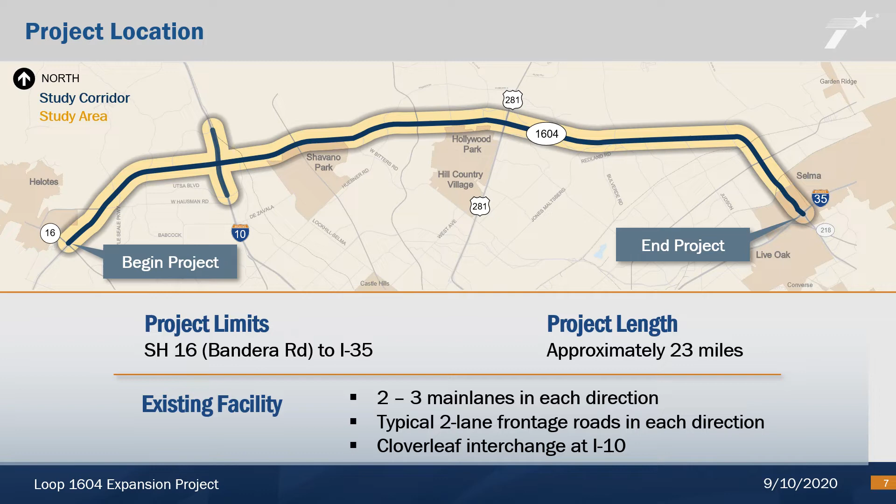The project limits on Loop 1604 extend from SH16, also known as Bandera Road, on the west end, to I-35 on the east end, a total length of approximately 23 miles. The existing roadway typically has 2 or 3 main lanes in each direction and 2 lanes along the frontage roads in each direction. The study area also includes the existing Cloverleaf interchange at I-10 and extends along I-10 from Camp Bullis Road to just south of UTSA Boulevard.

The Loop 1604 expansion project is needed because the capacity of Loop 1604 from SH16 to I-35 is inadequate to meet current and future traffic volumes. This has resulted in congestion, reduced mobility, and longer delays for drivers. The purpose of the project is to accommodate current and future traffic volumes in the project area, with peak period speeds closer to the posted speed limit.

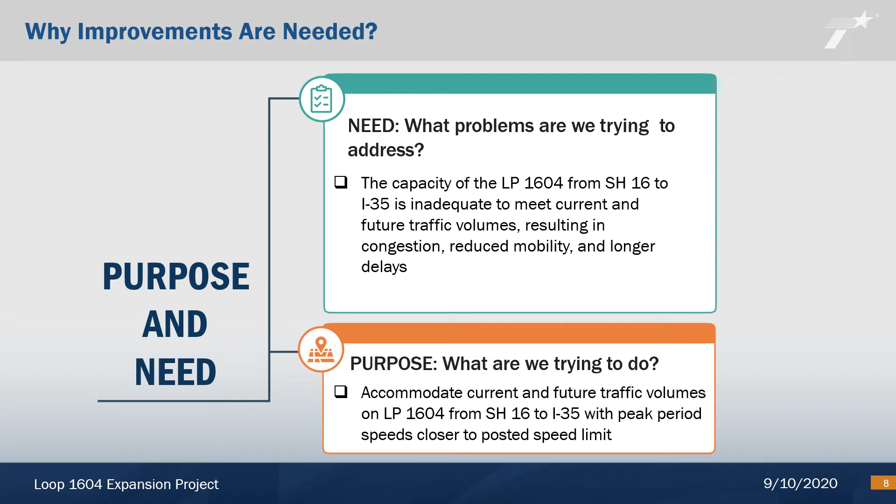In 2018, the existing daily traffic volumes along Loop 1604 varied between approximately 112,000 vehicles per day to 150,000 vehicles per day. By the year 2045, traffic volumes on Loop 1604 are expected to nearly double, with volumes reaching 225,000 to 290,000 vehicles per day. The existing travel times to go from one end of the corridor to the other are approximately 29 to 37 minutes. Without any improvements, these travel times are anticipated to increase to 64 to 113 minutes by the year 2045. With the proposed improvements, the travel times are anticipated to decrease to 26 to 30 minutes.

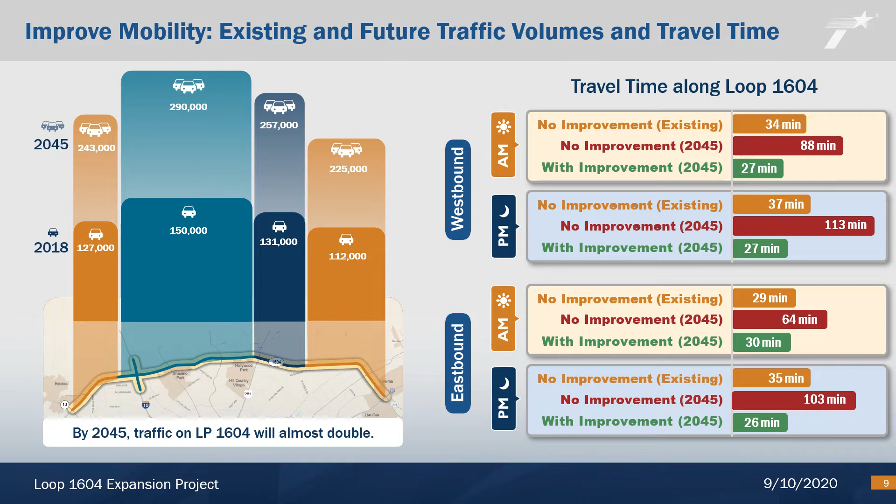The proposed improvements include the addition of one high-occupancy vehicle, or HOV lane, and two main lanes in each direction of travel with no toll lanes, a new fully directional interchange at I-10 and Loop 1604 to replace the existing Cloverleaf interchange, and continuous sidewalks and bicycle accommodations along both frontage roads. The proposed improvements fit within the existing right-of-way, so no additional right-of-way is needed.

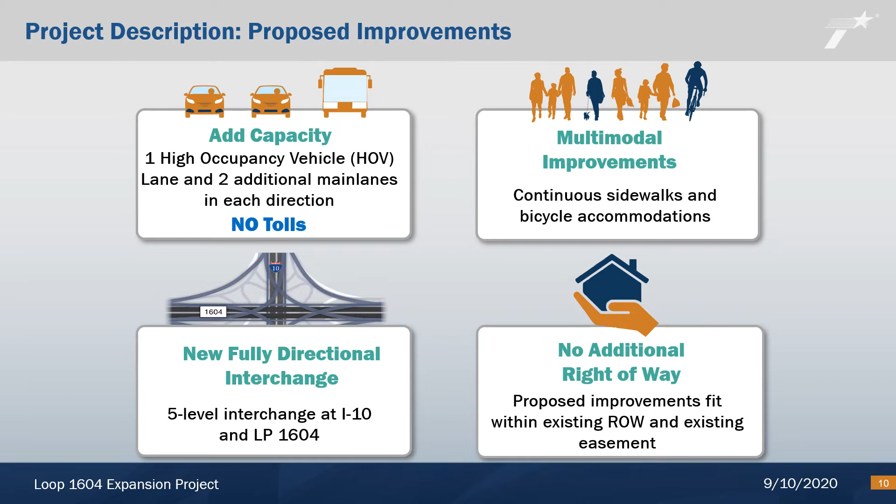The existing typical section along Loop 1604 generally contains two main lanes in each direction of travel, an open median, and two frontage road lanes in each direction of travel. Sidewalks are not continuous along the frontage roads, and the frontage road shoulders do not consistently accommodate bicycles.

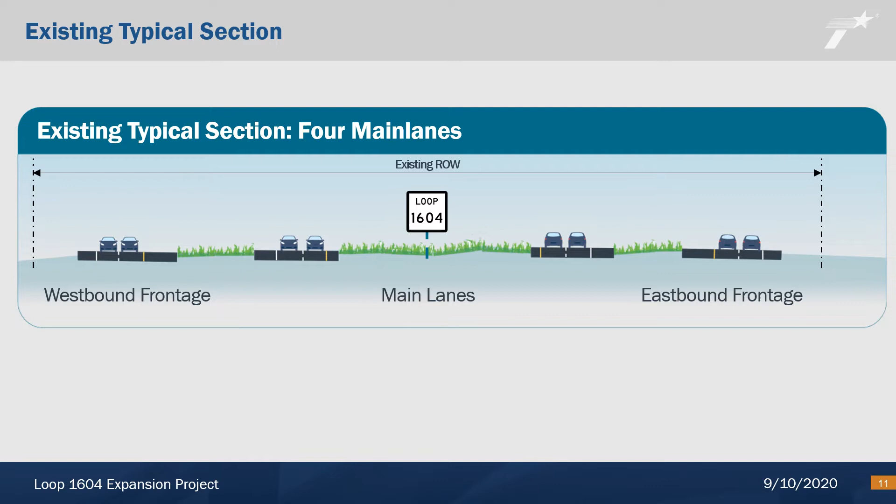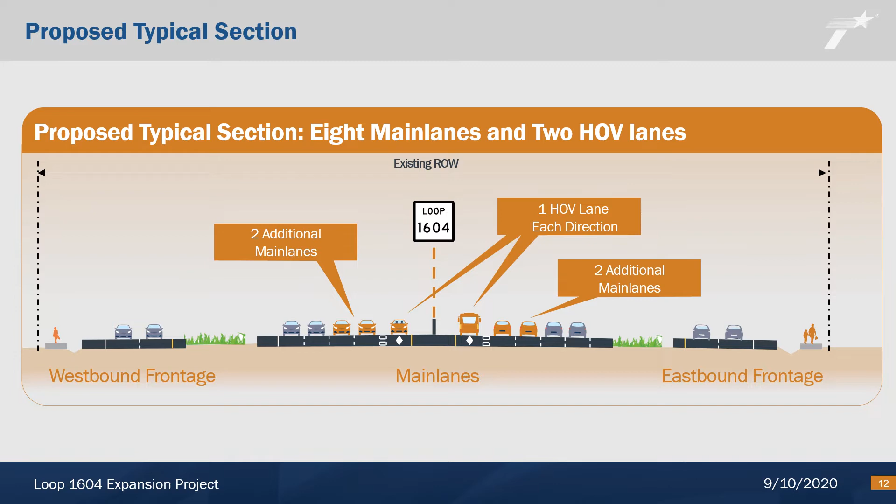The proposed typical section includes a total of 4 main lanes and one HOV lane in each direction, a closed median, 2 frontage road lanes in each direction of travel, and continuous sidewalks and bicycle accommodations along both frontage roads.

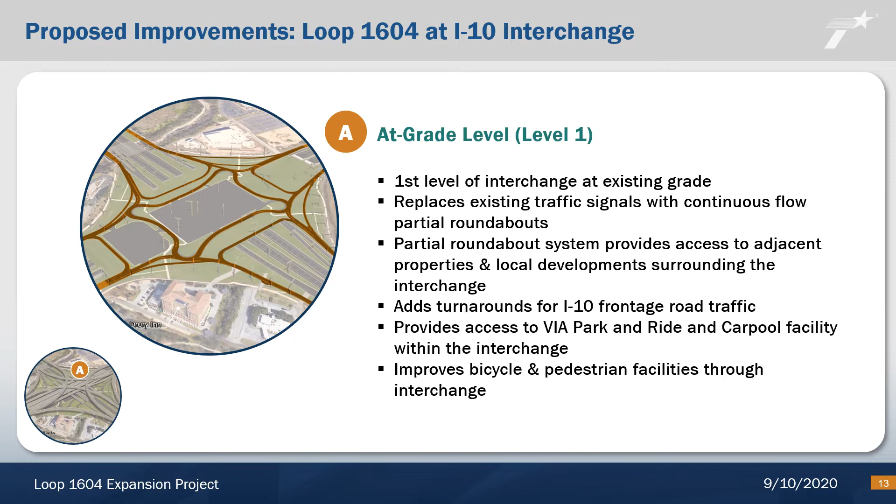The next 4 slides describe the different levels and the traffic movements at the proposed Loop 1604 and I-10 interchange. The first level of the interchange would be at existing ground level and would replace the existing traffic signals with roundabouts. This level provides access to adjacent properties surrounding the interchange area. Turnarounds would be added along I-10, sidewalks would be provided through the interchange area, and the existing VIA Park and Ride facility would be modified to fit under the new interchange.

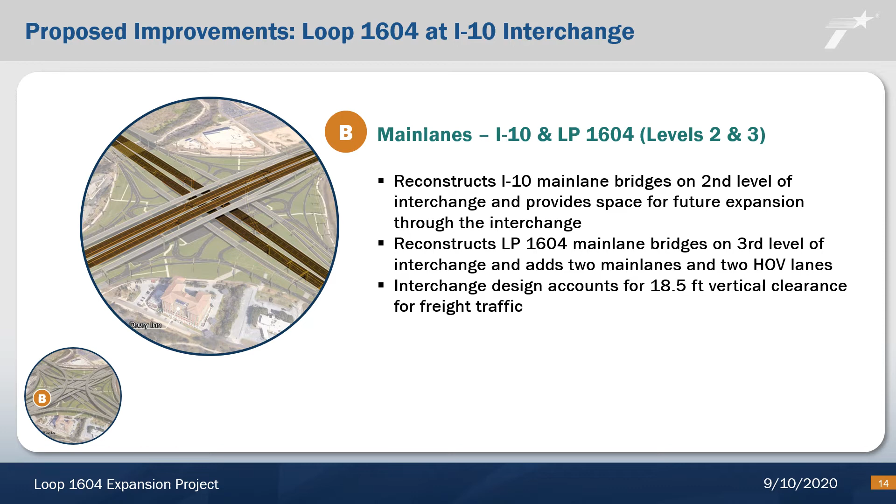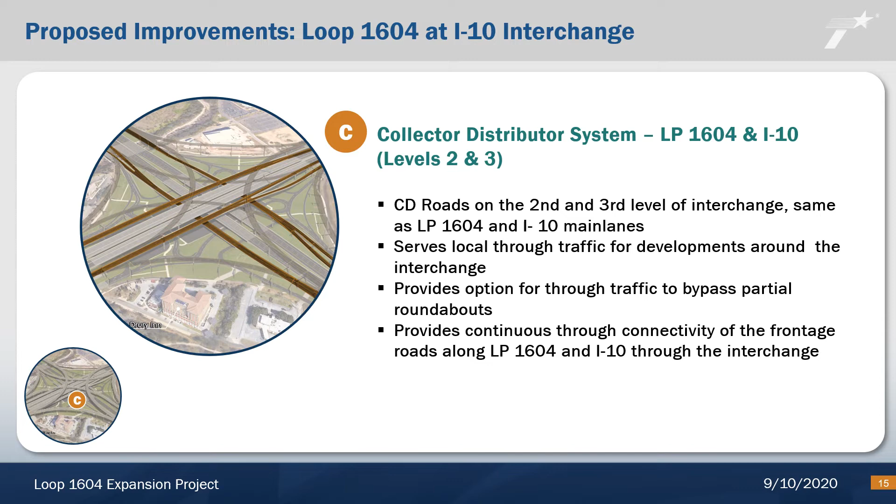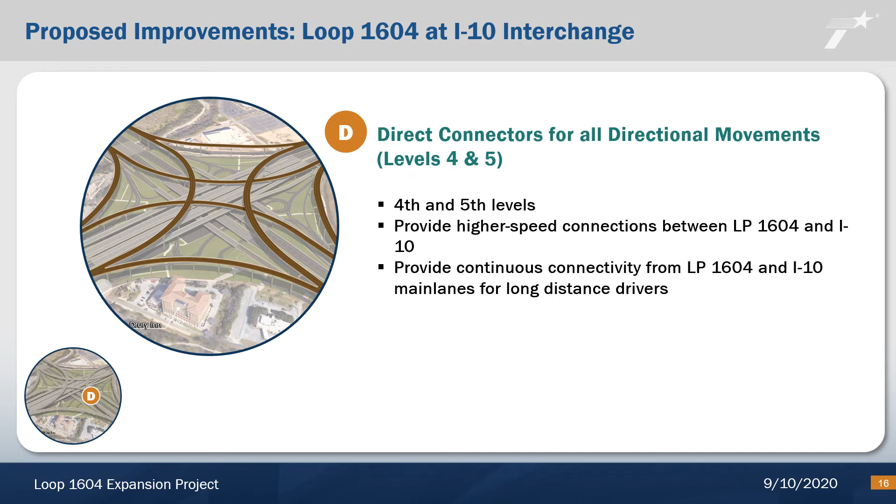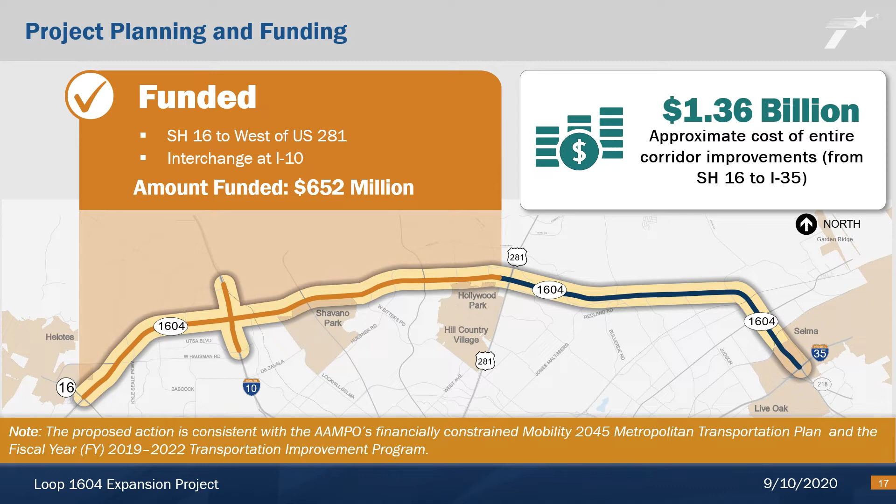The anticipated project schedule after this September 2020 public hearing includes the completion of the schematic design and environmental documents in late 2020, environmental clearance in late 2020, the start of construction on the Loop 1604 expansion from SH16 to west of US 281 in the first quarter of 2021, and the completion of construction from SH16 to west of US 281 in 2026.

Numerous environmental studies were performed for the project to comply with environmental regulations and policies. They cover a wide range of topics, including traffic noise, water resources, biological resources, air quality, cultural resources, community impacts and hazardous materials. These studies were documented in over 24 technical reports and summarized in the environmental assessment. The environmental assessment is available for public review and comment as part of the virtual public hearing and on the project meeting notice webpage.

TxDOT coordinates with various agencies regarding the project, including the Alamo Area Metropolitan Planning Organization, Texas Historical Commission, Edwards Aquifer Authority, Texas Commission on Environmental Quality, Federal Highway Administration, and the U.S. Fish and Wildlife Service. In addition, TxDOT has received public input from a variety of stakeholders, such as cities, school districts, and emergency services, and during open houses for the general public.

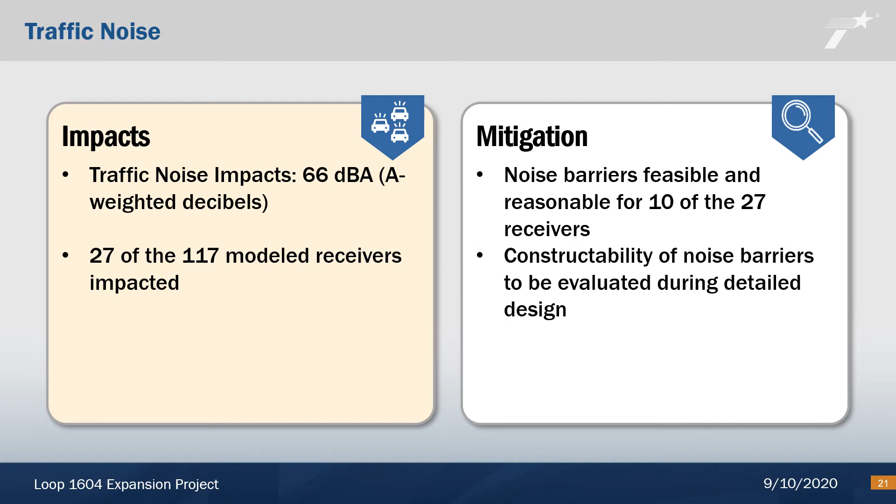The project would also excavate 1.1 million cubic yards of fill, soil, and rock from the recharge zone. Most of the excavation would be less than 10 feet deep. However, the drilled shafts for some bridges would be 80 feet deep. 9 sensitive features, primarily solution cavities located at the base of road cuts adjacent to the main lanes, would be removed by the project. The project would not directly affect groundwater because the groundwater is located roughly 140 to 225 feet below the surface.

However, the near-surface impacts quantified here may indirectly affect underlying groundwater quality during construction through the erosion of disturbed soils and spills of construction-related materials. After construction, the additional impervious cover would accumulate pollutants which may infiltrate to the underlying groundwater if the runoff is not treated. The project would include mitigation to avoid and minimize impacts to the Edwards Aquifer during and after construction. The key mitigation elements include the following.

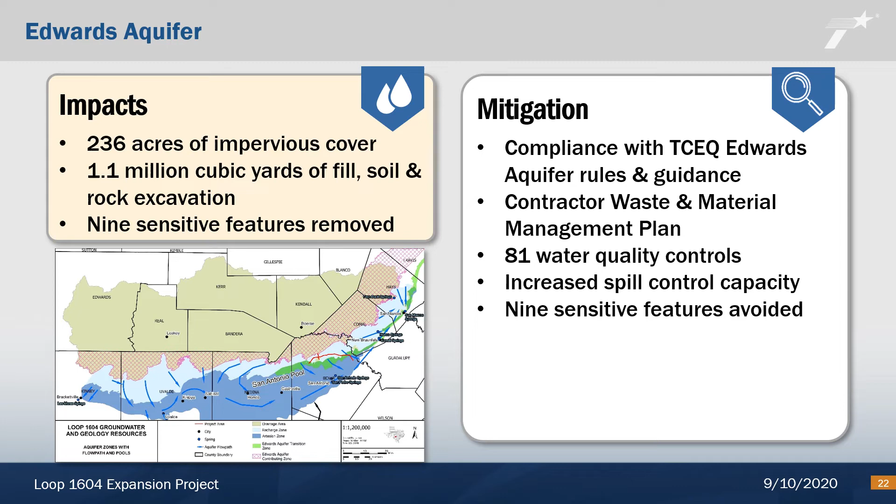The project would include the installation of 81 stormwater quality controls that use media filtration or detention to filter runoff before it is released to receiving streams where recharge may occur. The water quality controls would voluntarily be outfitted with valves that would substantially increase the post-construction spill control capacity of the facility. Finally, as previously mentioned, there are 9 sensitive features primarily along road cuts adjacent to the main lanes that would be removed. This would prevent spills from entering them. There are 9 other sensitive features, mostly in creeks, that would be avoided by the project. Due to the required mitigation and voluntary conservation measures, the project would not be expected to adversely impact groundwater quality.

Although geologists and karst scientists surveyed the right-of-way extensively, no other occupied caves were found. However, it's possible that the excavation necessary for the proposed project could result in the discovery of more caves, and this may adversely affect endangered species. There is also a designated critical habitat unit in the action area near UTSA. Based on the project's design, avoidance, and minimization measures, the project would not adversely affect the critical habitat unit.

There is potential habitat for the golden-cheeked warbler, which is a small endangered bird, in various locations along the corridor. The project may remove up to 7 acres of potential habitat for the golden-cheeked warbler. With respect to mitigation, TxDOT is engaged in formal consultation with the U.S. Fish and Wildlife Service regarding the project's effects to listed species. The project would include a variety of voluntary conservation measures to benefit the species while also permitting incidental take associated with the project.